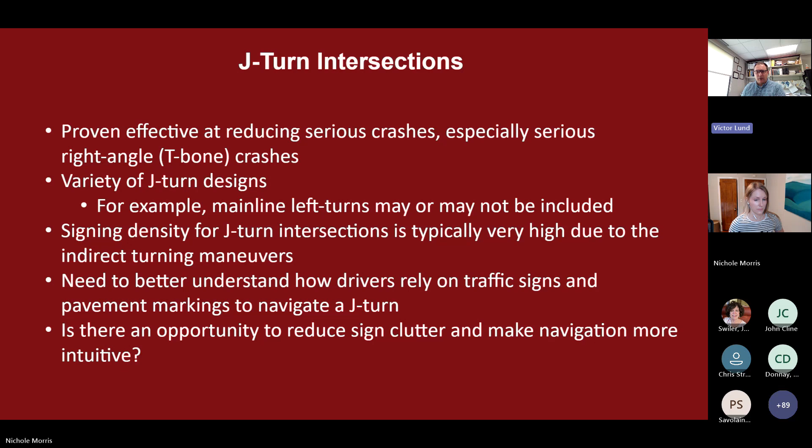Thanks, Vic. So we've had a great opportunity to do a series of studies examining J-turns from multiple aspects. The first is looking at community acceptance. So to Vic's point of this really being such a life-saving intervention at high-risk intersections, it's important that the communities are accepting of these intersections when they are proposed. And if there's strong community pushback, that can result in delays and increased costs.

And to that, we find in a study I'm going to discuss in a few moments that initial errors that drivers experience on these intersections, some of these initial confusions, can really poison the well, so to speak, for their acceptance of these intersections, leading to word of mouth discussion across communities about these being good or bad. So it's really important that people are accepting and they have good experiences, particularly good first experiences.

So I'm going to talk a little bit about the types of errors that we've been observing at J-turn intersections, and then some of the studies that we've been doing to see in what ways we can mitigate these errors through signage and design.

So just really quickly, I want to touch on the work that we've done, and this was also MnDOT and local road research funded research into the types of educational messaging. So the use of educational materials like brochures, flyers, presentations, but also customized messages and strategies. And we find that more than anything, there's really no bad way to educate.

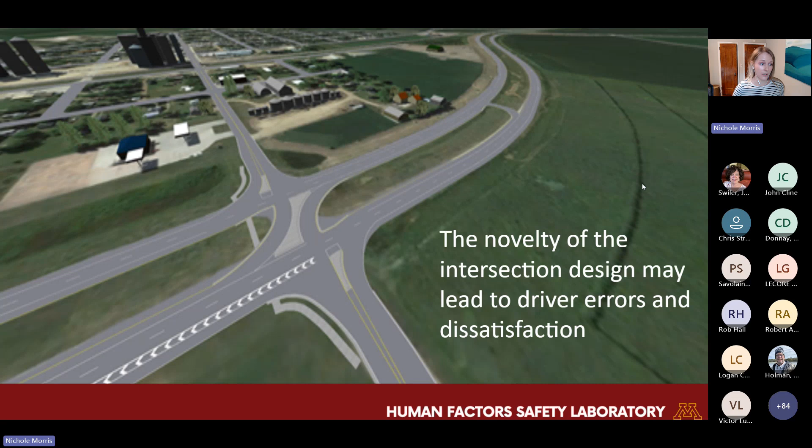So we do find that the novelty of the intersection. Of course, this is going to get easier here in Minnesota and other states the more J-turns that you install. And so the novelty will start to diminish, but still you're going to be capturing drivers who are going to experience these for the first time and feel like they're really counterintuitive. And these are just kind of crazy things that these engineers are coming up with. So it certainly can cause some initial errors and some dissatisfaction. We have found that on the first drive they tend to have more major and moderate errors. So major errors like missing the U-turn altogether.

That could be very frustrating if you have to drive another mile down to turn around. More minor errors tend to occur later on, so after they have more exposures. But we do find that if they have a more major error on that first exposure, their acceptance and their willingness to drive on the J-turns or want them in a community tends to really tank.

So we want that first experience. It's all good and well to say, oh, people learn these over time, but it's really important that they get it right from day one. One, we don't want that first experience to be cataclysmic where they have a collision, but also we just don't want them to drive away with a bad experience.

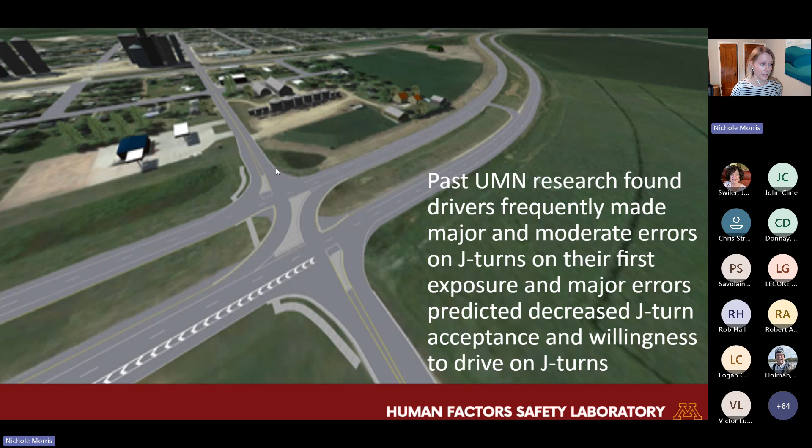So we have a really immersive driving simulator in my laboratory. And so we've presented drivers, this is a real intersection near Heron Lake in Minnesota that we modeled. It is a compact J-turn. So you can see from the stop as they're coming down from the top of the image, they're supposed to drive immediately into that deceleration lane.

But we tend to see kind of a range of errors. Less frequent, but we did still observe in the simulator people driving through that middle, so a wrong way through that permissive left turn, which obviously could be a very dangerous maneuver. The middle one here is just someone full on missing the U-turn, so they make the right turn and they don't change lanes, they don't get into the deceleration lane, and they drive on past.

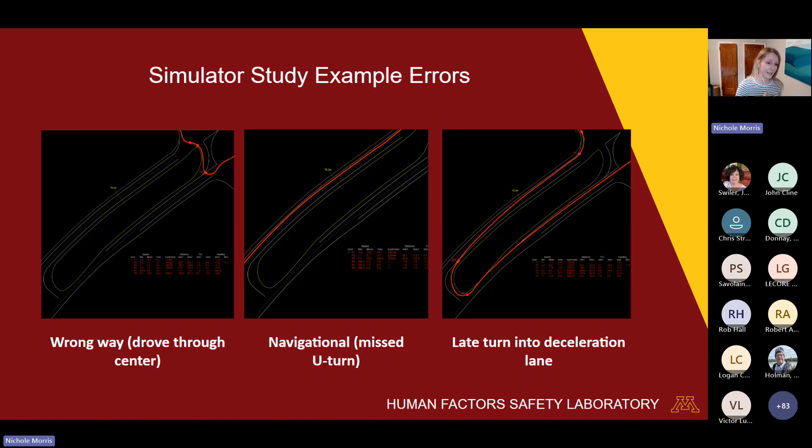Versus a more common type of error that could result in sort of a more minor crash, like a sideswipe crash, which is a late turn into that deceleration lane. That's one of the most common errors that we saw in this study, people having a hard time knowing that they needed to drive straight into that deceleration lane, resulting in a lot of very quick last minute maneuvers to get over once they realize, oh, that's where I'm supposed to go. I need to get into that U-turn lane.

So to show a little bit of validation, there's always sort of the question, does the behavior that we see in the driving simulator match what happens in the real world? So this is a video that we took up in District 1. This is a new J-turn intersection near Homestead Road and Highway 61. This vehicle was at the stop sign, should have turned, I'm going to play it again, should have turned and gone down to this U-turn and come around, but did not. So it went into that left turn.

So what's interesting about this intersection is it does have a permissive left only from one direction. And so in cases where you're seeing a lot of this behavior of wrong way driving through the middle, it could be intentional. They know they're not supposed to do it, but they do it anyway because they don't want to take the U-turn. Or sometimes drivers are just genuinely confused and not sure how to get across any other way. So they feel like it's wrong, but they do it anyway. Eliminating all permissive lefts and forcing all drivers to use the U-turn could be a solution.

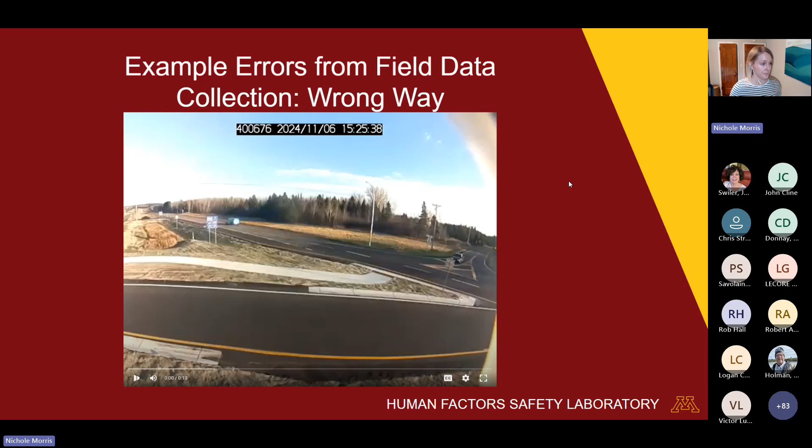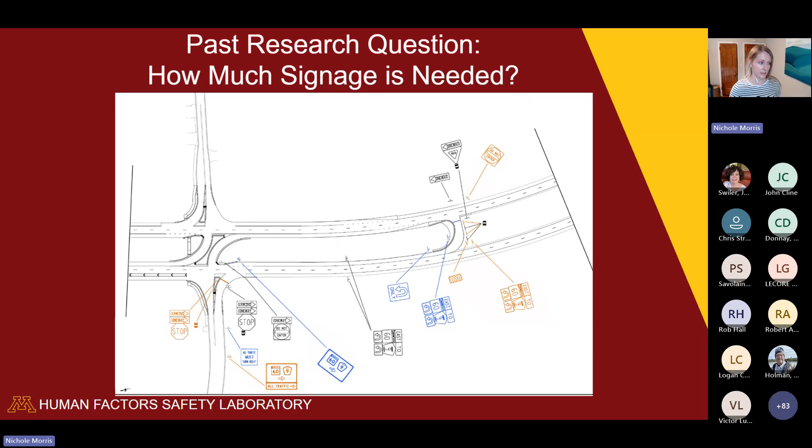So the question is, how much signage do we need? This was from that original study. We had 3 different layers of signage, either just the black signage, layering in the black and the blue, or all 3 colors. And so the question was, are drivers really supported through more signage? Are we getting the right bang for our buck? Is it reducing errors? And we found that the errors that we saw in them navigating the intersection weren't really predicted very much by the signs.

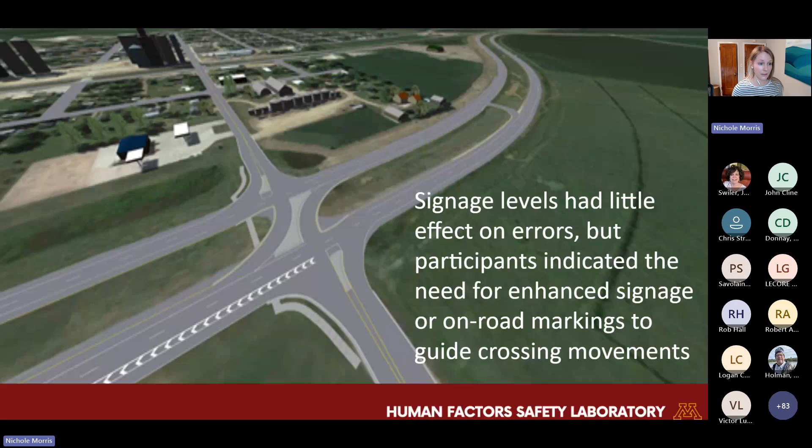The most predictive piece to the errors was just their experience. Over time, they tended to get better. But interestingly, even though they in some ways reported being overwhelmed by the amount of signs in that max signage condition, they still felt like they needed enhanced signage or on-road markings to guide their travel. So it gets to this idea that you have to make sure that the signage is appropriate and is really giving them the information they need. They tend to get overwhelmed and the signage that's present may not be helpful.

So in our current study, we're looking at how can we change some of the signage to better guide their navigation through the intersection, particularly knowing the types of errors that they tend to make? How can we try to mitigate those? So we're looking at an extended U-turn and a compact U-turn.

So the extended, you would be making a right turn and making lane changes to get over to that U-turn, which is further down the roadway, versus a compact where you're going to drive right into the deceleration lane. And we're looking at kind of some control signage the way that it typically is done versus some experimental signage.

So one thing that we are looking at is the fishhook signage. So having that more visible to really sign out that they're approaching a U-turn and give them that bird's eye view of what they're about to approach. And also some on-road marking. This is an implementation that we're testing just for the compact U-turn, not the extended, to guide their movements straight into that deceleration lane.

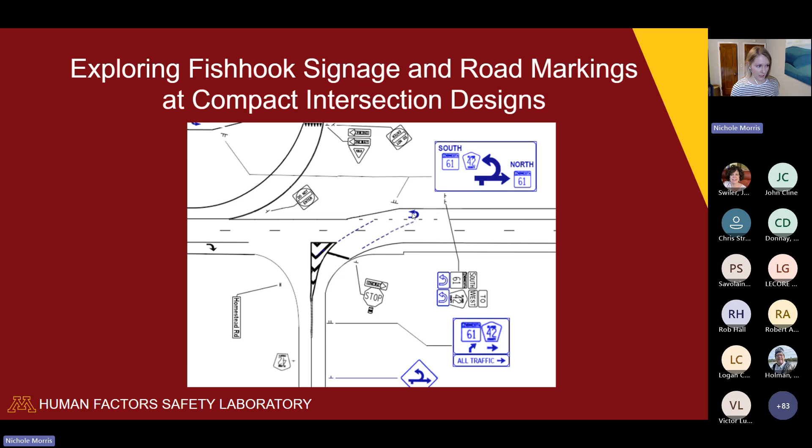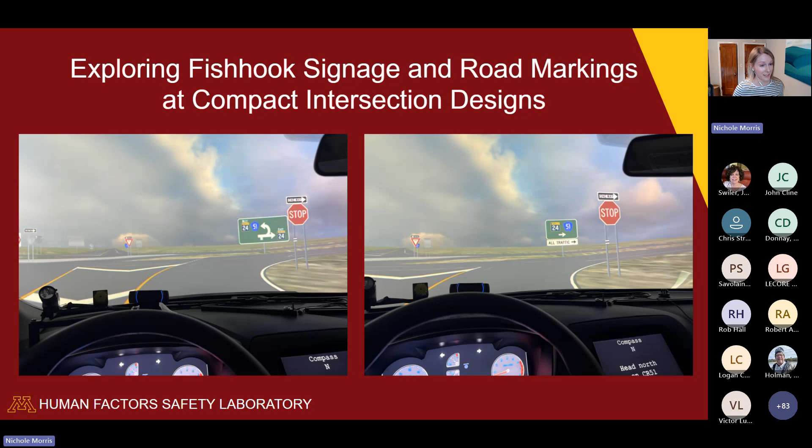Because if they don't enter it right away, then they have more opportunities for error and the sideswipe crashes. So we need to get them right into that deceleration lane. So that's one of the things that we are testing. This is what it looks like from the driver's seat in my driving simulation. We do have these signs slightly oversized just because we don't have quite the same resolution as you would in the real world. And we're also looking at the fishhook on the U-turn signage versus the straight arrows.

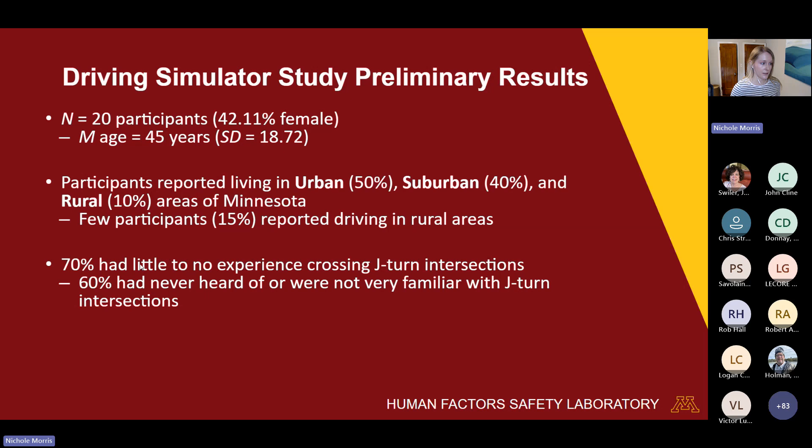This is new guidance from MUTCD that we think there could be some opportunities for confusion, particularly if you have a county lane that coincides with that U-turn, may confuse drivers about where they need to go. So our preliminary findings so far, we're aiming for 60 participants, so we're about a third of the way through. This is our sample. A lot of drivers from urban and suburban areas, so not as familiar with these J-turns as you would in rural areas of the state.

So we have a lot of data that we pull out of the driving simulator, but for instances like this, we like to do what we call live error coding, so we can be looking at our results in real time. So we have lots of cameras on the participants and on the simulation. And what we're finding is that they certainly are still making navigational errors, so not following the instructions of what roadways they're supposed to get into in which direction.

And we are seeing that late turn into the deceleration lane is occurring, again, particularly more with the compact U-turn. So that's a really common error, again, likely for them to miss the intersection. And we are finding that compact U-turn intersection is more error prone than the extended U-turn intersection. And as with the other study, we are seeing, thankfully, that the errors tend to diminish pretty quickly. But we don't have enough data at this point to determine whether or not our signage is having any significant impact on the errors that we're seeing so far.

So moving forward, we'll continue to collect the rest of our data to get to our target 60 participants. And we also have then a corresponding intersection, the video that I've shown you previously of the driver cutting through at Homestead Road. So we have another round of data collection that we're going to be doing to look at changes over time. We have video from before the intersection was installed, just after the intersection is installed, and now about 8 months later. So our goal is to really provide some design guidance about potential signage changes and marking improvements.

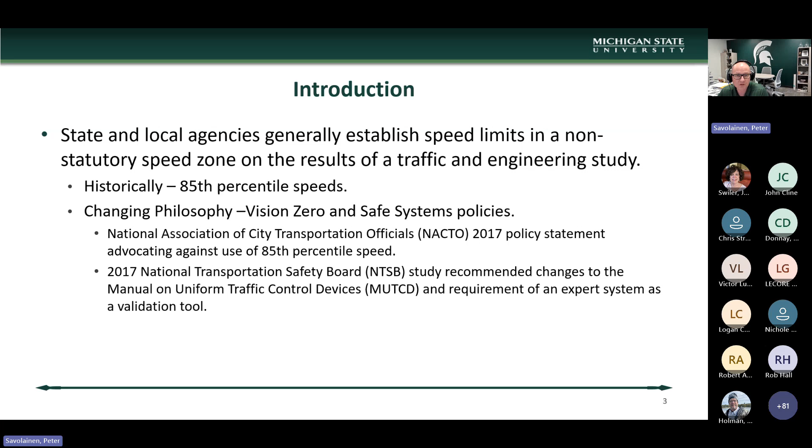I'm sure many of you in the audience are familiar with how we historically have established speed limits. There's largely been a reliance on the 85th percentile speed, and with Vision Zero and safe systems approaches to traffic safety, we've seen a shift away from that. NACTO, of course, had advocated against its use back in 2017, and similarly, the National Transportation Safety Board had recommended changes to the MUTCD, and we have subsequently seen those come into effect as part of a broader effort to help make roads safer for multimodal users, especially pedestrians and bicyclists, as opposed to the more vehicle-centric approach we've used historically.

To that end, Minnesota, as you're also likely aware, has a statute that advocates for a complete streets approach to roadway design that considers safety and accessibility of all users of all backgrounds and characteristics. An important aspect of that is selecting appropriate design speeds or target speeds. As part of those efforts, we often use complete street policies to modify some of the cross-sectional environments, so varying lane and shoulder widths, introducing bike lanes and various other features that make it safer and more accessible for that broad range of users. Unfortunately, historically, there's been surprisingly limited research as to the impacts of these different features and treatments on actual travel speeds. That was ultimately the big picture goal of this project.

What we were trying to do ultimately was answer the three questions you see here. First, when we go from high-speed rural highways into, say, rural communities, how do drivers reduce their speeds as they see speed limit reductions introduced? Beyond the speed limit, what other elements of the roadway environment help to reduce those speeds? And how do those effects carry over downstream of where those features are introduced, and on the upstream side, when and where do drivers start those speed reductions? Ultimately we looked at those factors and combinations so we could develop guidance to help you as designers make more informed decisions on how to better control speeds through these different types of roadway environments and communities.

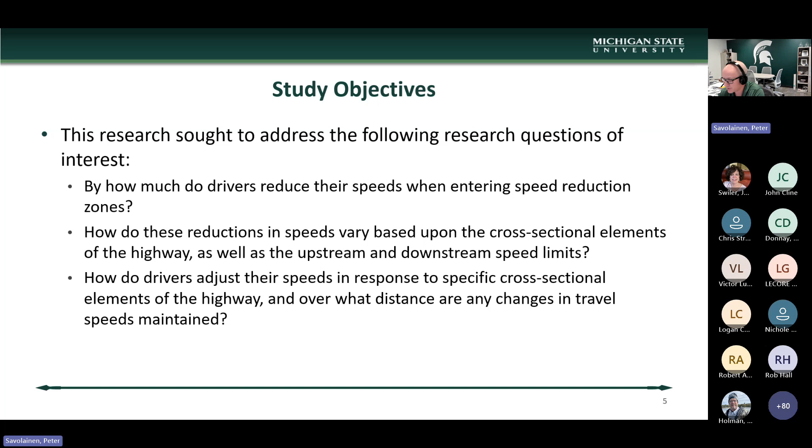At the onset of this study, we worked with the technical advisory panel and selected 19 corridors from various areas across the state. Along those corridors, we had 39 different segments where we set up speed observations using hand-held LiDAR data collection devices. I've got to acknowledge the efforts of my students and staff who were out there for many hours tracking vehicles with LiDAR. Data were collected during off-peak weekday periods, since we wanted to capture free-flowing traffic, so we're looking at minimum headways of 3 seconds.

On the right is a table summarizing the ranges of speeds we saw in those corridors. Oftentimes those rural highways would have speeds of 55 or 60 miles per hour, reduced to 45, 40, down to minimum speeds of either 25 or 30 miles per hour. Typically, these were in speed transition areas, on the approach to small rural towns. We also tried to select sites with a diversity of geometric features, so different median treatments, including raised medians and two-way left turn lanes. We sought to understand impacts of on-street parking, shoulders versus curb and gutter. We had some bike lane sites, and some sites with curb outs, etc.

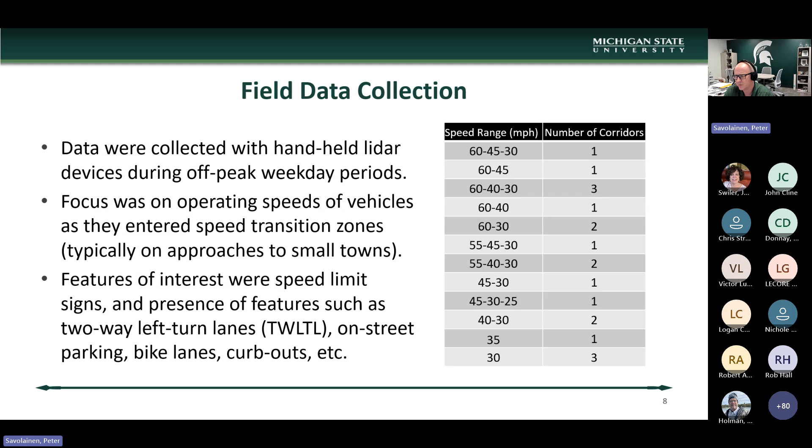Schematically, we had data collectors out in the field using LiDAR guns, in sequence of either 2 or 3 observers as you see here. The first data collector would track a vehicle as it transitioned from the higher speed rural environment entering the small town. As speed limits were reduced, we would hand off to the next data collector in sequence. In some instances, we had multiple speed reductions, so we'd add additional data collectors. Beyond just capturing speed limit reductions, we also wanted to capture other changes in the cross-sectional environment.

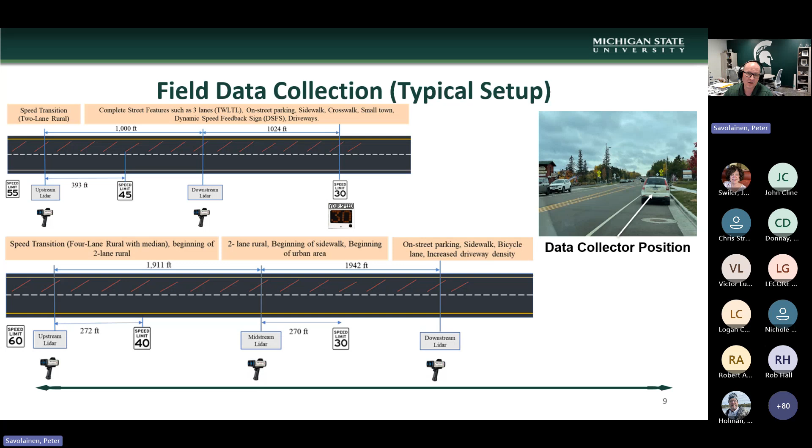The next slide shows a sample speed profile from one of the sites on Minnesota 37 and Gilbert, where the first data collector was collecting near the 60 mile per hour upstream limit to a reduction of around 40 miles per hour. We then handed things over to the second data collector as we approached the lower 30 mile per hour limit.

And then we had some other features that were introduced there, for example, a bike lane that came in subsequently. And so what we were able to do, rather than just observing vehicles at given points as we would in a spot speed study, the LiDAR data allowed us to have much richer information to understand the nature of those changes and how they varied over time and over space.

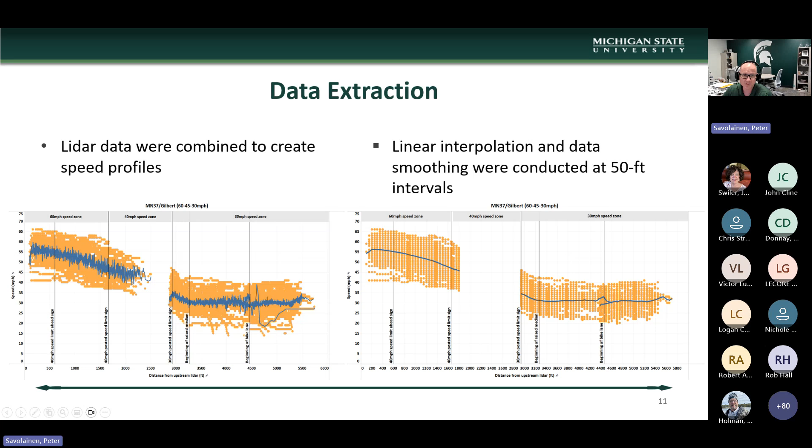And so subsequent to this, we had conducted a statistical analysis to try to understand what are the impacts of those speed limit reductions and what are the impacts of those other features that are sometimes introduced concurrently or upstream or downstream to where those speed limit changes went into effect ultimately. And so now I'll briefly walk you through some of the study results here.

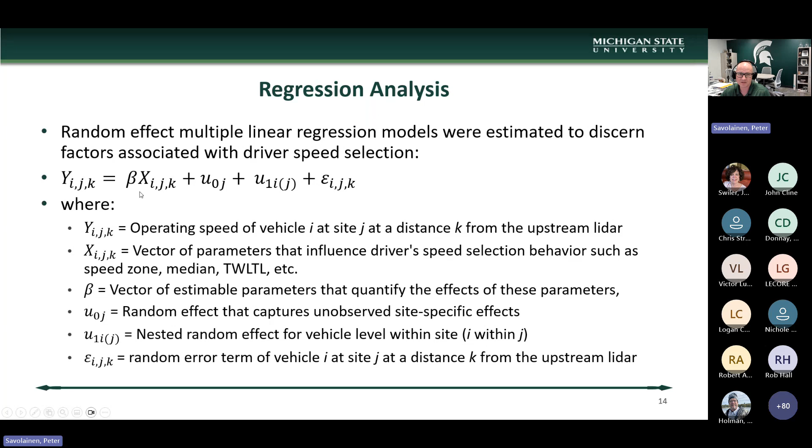And so first of all, the average speed upstream before we get into the speed reduction zones was around 64.5 miles per hour. And you'll see here what's happening. These are basically telling us as we're approaching a speed limit reduction from upstream, how those vehicles are starting to reduce their speeds. And so you'll see generally we saw this nice smooth profile here. Vehicles would start to reduce speeds roughly 800 feet upstream of that first reduced speed limit sign there. And that was fairly consistent site to site. And you'll notice fairly smooth reductions here that became more rapid as we got nearer to the speed limit reduction sign itself.

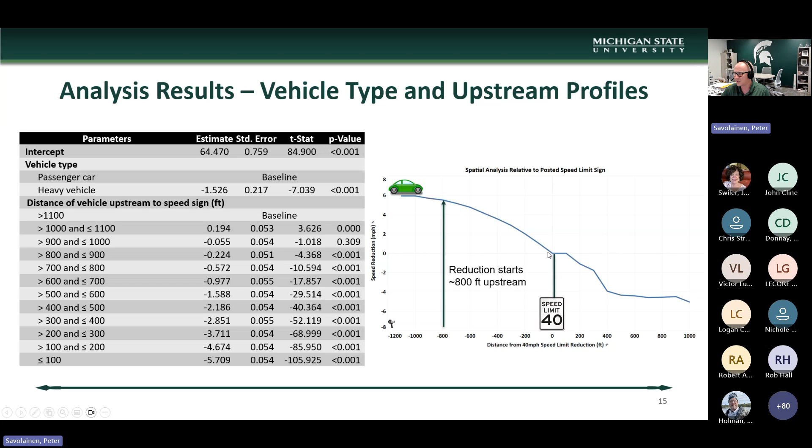And as I click ahead to the next slide here, we also track those vehicles beyond that speed limit reduction. And so you see here those vehicles continued to reduce their speeds, and then it would start to plateau roughly 400 feet downstream. And so from that point forward, we tended to see relatively stable speeds.

A quick note here, this profile on the front end as we approach the sign from upstream was fairly consistent. Some of the variability you see here is due to the fact that sometimes we'd have a second speed limit reduction, and so there's a little bit more noise there. But we were able to tease out some of the effects of not only the speed limit signs here, but some of the other factors of interest.

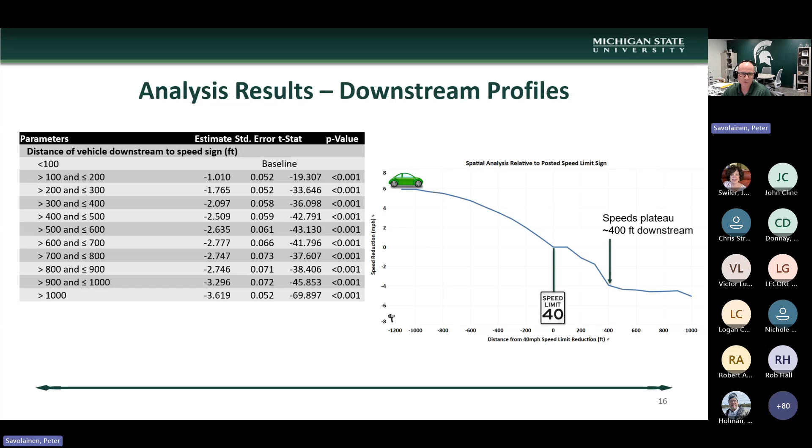We also saw significant reductions when we had a raised median. And so, again, in the more urbanized areas, these often provide pedestrian refuge islands, and they're another visual cue to drivers that they should look at reducing their speeds. We also saw smaller effects, but reductions when we saw depressed medians or two-way left turn lanes. So these are all basically compared to our baseline condition, which was an undivided two-way roadway. We saw areas that had on-street parking were about 1.7 miles per hour lower speeds on average.

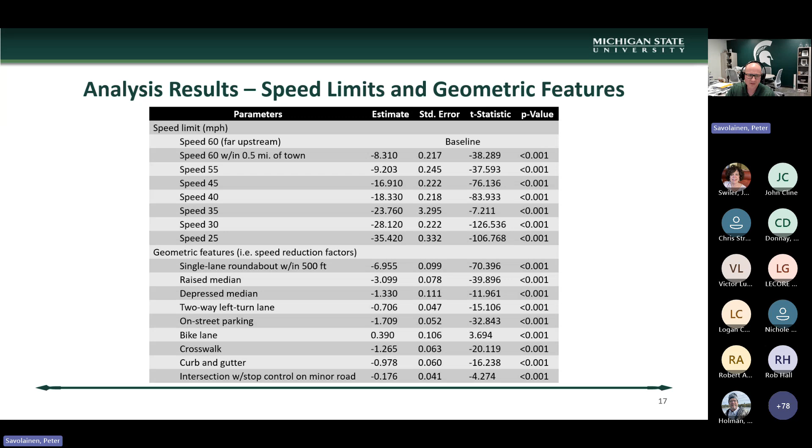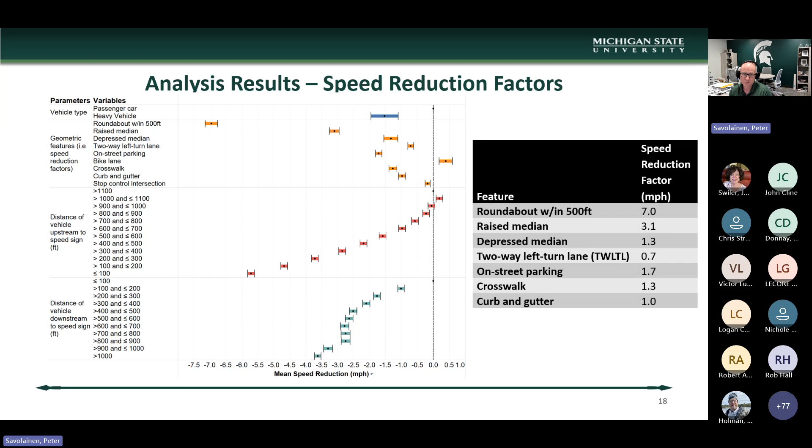And then the next two sets here, this shows as we're approaching that speed limit sign from upstream. So this is far upstream. And as we get nearer and nearer to that sign, these speeds get lower and lower. And then those same trends continue as we get downstream of that sign. And that's what you see here graphically as well. And then what we are basically recommending for inclusion in MnDOT and local design guidance are these speed reduction factors. And so we have a general sense of, on average, if you introduce these features, this is what you could expect to see in terms of impacts on mean travel speeds.

Now, in addition to mean speeds, there's other factors that are important as well. Of course, if we've got high variability in travel speeds, that's been shown conclusively to increase the risk for crashes. And so what we did, in addition to mean speeds, we looked at the variability in speeds, basically at 50-foot increments as vehicles were traversing these corridors. And we estimated some regression models.

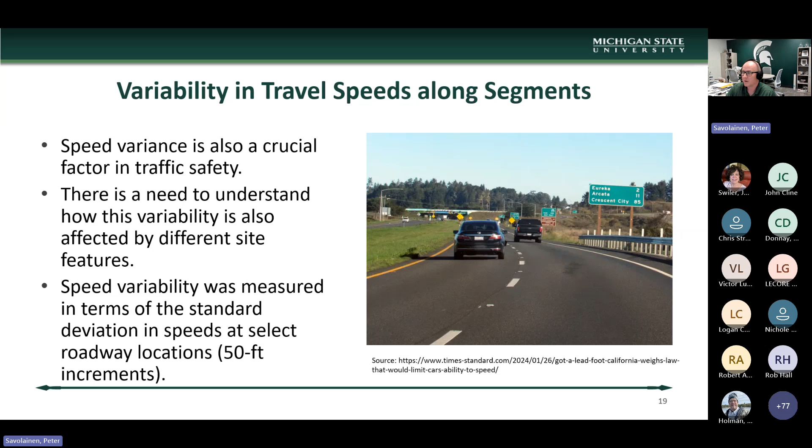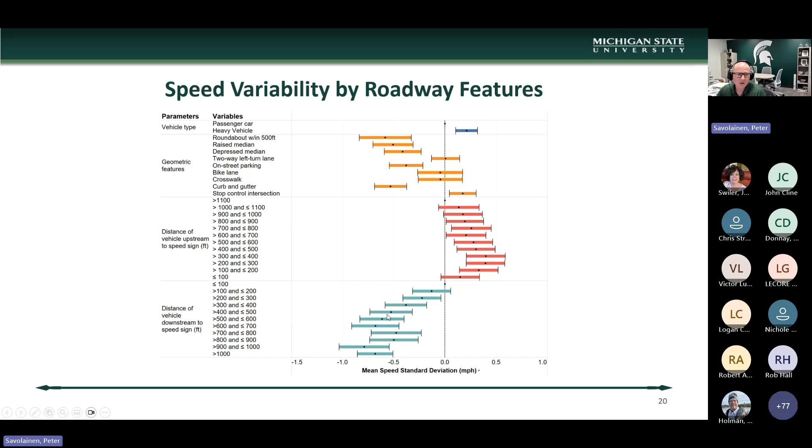In addition to variability in speeds, we also looked at an important aspect here in terms of compliance with the speed limits. And I think unsurprisingly to many of you, more than half the drivers across the widest range of limits tended to exceed that posted limit. We also looked at how many were 5 miles per hour over. And so we see a bit of variability there. Compliance tended to be best in the high speed immediately before the reductions went into place, and also in the lowest speed areas. So we saw poorer compliance in those intermediate speed ranges.

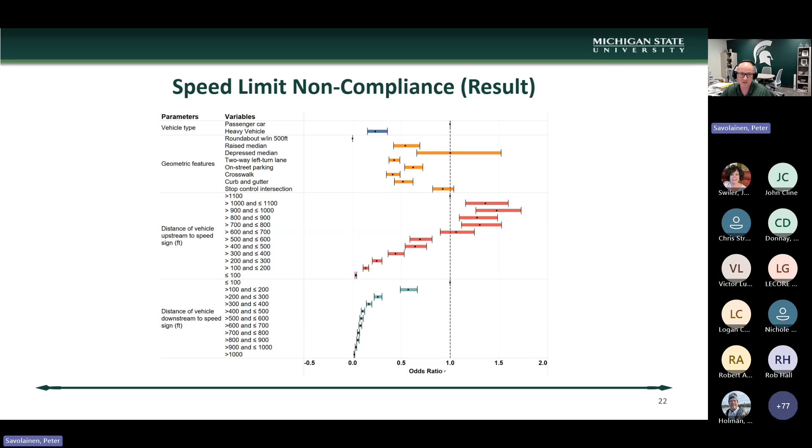And so wrapping up then, just in terms of some conclusions and recommendations, as I had alluded to in the preceding slide, we generally saw the best compliance immediately upstream of where those speed limit reductions occurred, and then also in those lowest speed environments. And so that suggests from a policy or practice standpoint, if we focus in that moderate speed area, so say 35 to 45 miles per hour, that's where we might see countermeasures have the most promise for effectiveness.

That speed reduction, again, consistently starts roughly 800 feet upstream and continues those reductions 400 feet downstream, at which point they tend to plateau. Another question that arises from that is how far might that continue beyond 400 feet? And that's something we're continuing to look at. We looked at a few other factors as well. So median width, we didn't have a lot of variability here. So we actually have some follow-up work where we'll be working with a technical advisory panel to identify a few sites that have medians of varying width.

Lane and shoulder width, we didn't see as much variability. So predominantly we saw 11-foot and 12-foot lanes. We're hopeful to get some work. I think once we get down to 10 feet, we'll see a bit more pronounced effect there. And similarly, the shoulder widths tended to be a bit wider in some of these rural communities as we were coming into those towns. We're also looking potentially at if we see isolated islands rather than continuous medians, whether we see any differences there. But in this initial study, sample sizes really weren't large enough that we could show any conclusive effects.

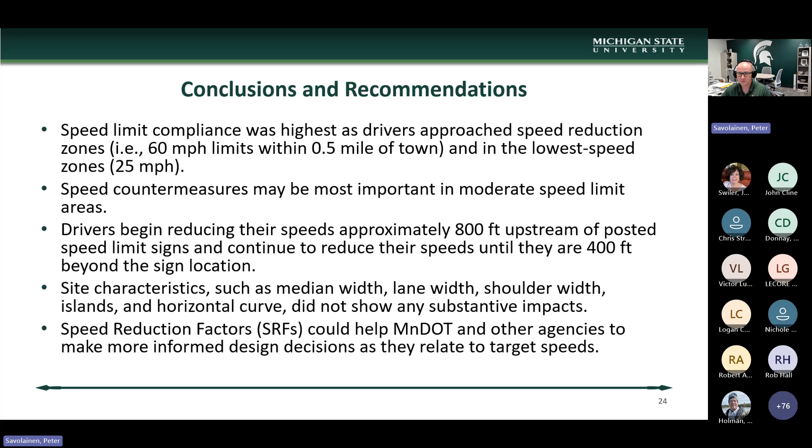And so from the agency perspective, what you're probably most interested in here are those speed reduction factors I had alluded to. And so the hope here, we actually have some follow-up work that's going to start in the state of Washington in about a month. And we're doing some companion work here in Michigan as well. And so the hope is through all those studies collectively, we can integrate those results and really give you all good ammunition as designers to better understand how we can help to keep those speeds in that target speed range that we're most interested in.

Roundabouts, again, beyond the safety improvements, we see sustained effects there, speed reductions of up to 7 miles per hour. And we've seen this in other locales as well. So if you think about corridors that have roundabouts at some intervals of spacing there, that's a promising speed control measure. And then the median treatments, that physical barrier in the presence of the motorists and that refuge for pedestrians and bicyclists tends to have a sustained effect.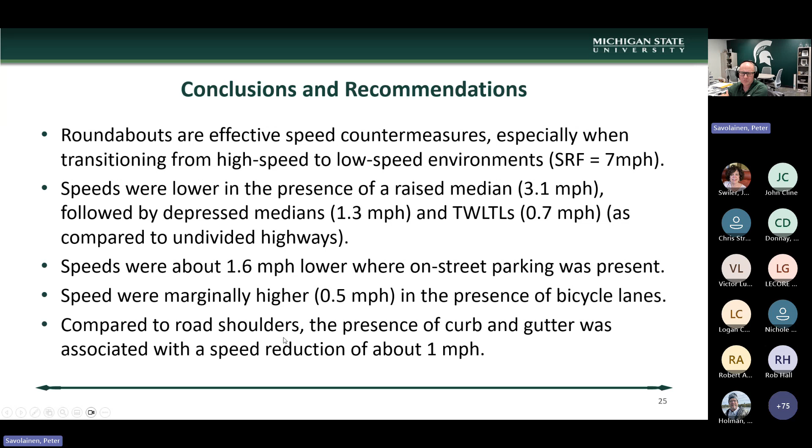We're going to investigate on-street parking a little bit further as a part of some of our follow-on work here as well. So there's questions about parallel versus angle parking. I mentioned the bicycle lanes. So we did see marginally higher speeds there, but important to note that there weren't any bicyclists present at that time really. And we're also planning to look a little more in depth at the differences between shoulders and curb and gutters.

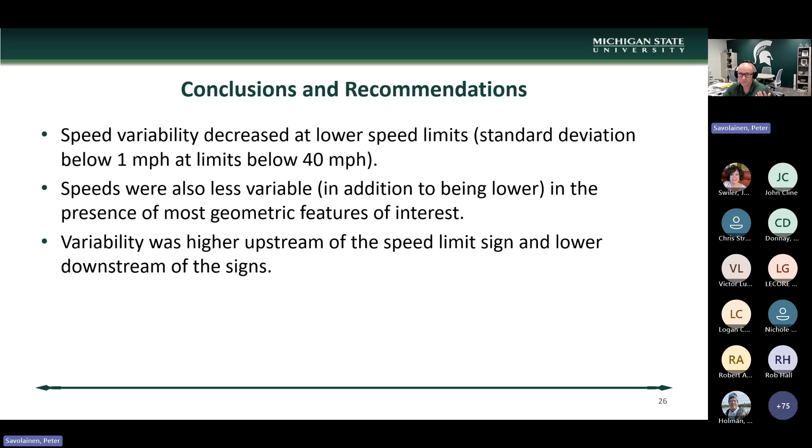And so as we look at this from a big picture standpoint, as we mentioned, most of the features that were of interest to the TAP did show at least some degree of efficacy. And so now it's a matter of trying to determine which treatments and combinations of treatments work best in different settings, and trying to focus again on lowering the mean speeds, the variability, and improving compliance as well.

And so wrapping up here just with some limitations and future research. So one of the big ones there, we did see lower speeds with crosswalks, but we didn't see a lot of ped activity, and then marginally higher speeds with bike lanes. We're going to investigate those further in a soon to launch project. And then there are a few other different types of features that we may potentially look at.

Nighttime data collection is a little bit tricky. That's one we'll look at in a companion project that's focused on speed limit reductions, where we'll use radar, basically black cat radar devices, since we can't really effectively, for the safety of our data collectors and from an efficiency standpoint, do that. But there's a few other things we aim to look at here as well.

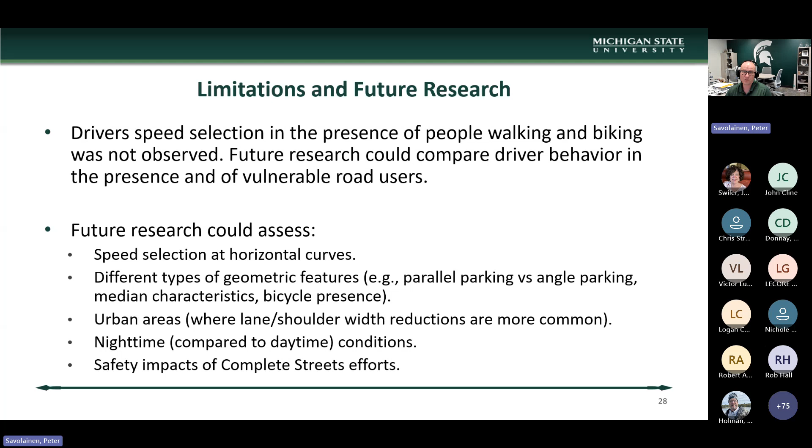And then ultimately downstream, once we have all the speed data in hand, we can also start to look at what some of the safety impacts are here as we look at things like crash modification factors that could be tied back to those speed reduction factors.